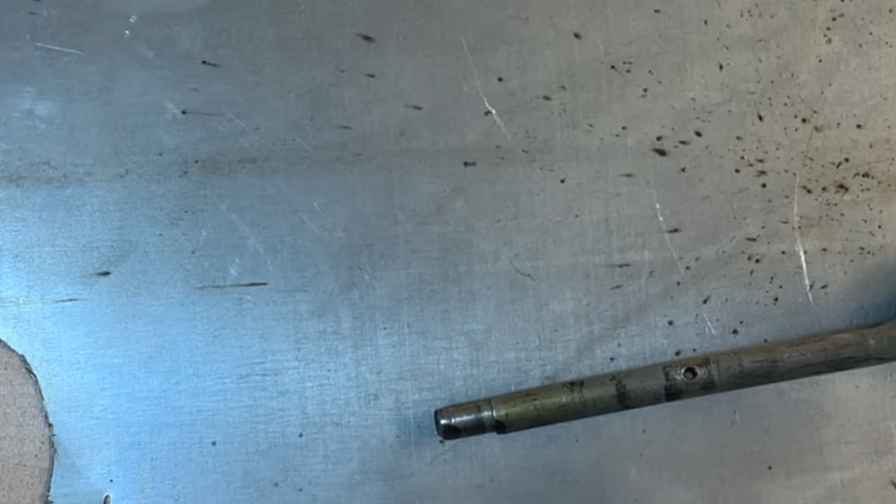Hey guys, welcome back. So in the last video, I was removing the M46 shifter from my 77 242, and I realized that the shifter, or the shift knob, did not match the transmission that came with the car, and we had to do some customizing to make it fit correctly.

In this video, I'm going to actually be taking apart that shift lever to replace some of the worn pieces in it, including the reverse lockout shift rod. And also I'm gonna attempt to fix the nicks and the dimples that were created on the shift lever ball from the lack of bushings before. And then if we have time, I'm going to try to turn it into a short shifter as well. So I'll get right down to disassembling the shifter now.

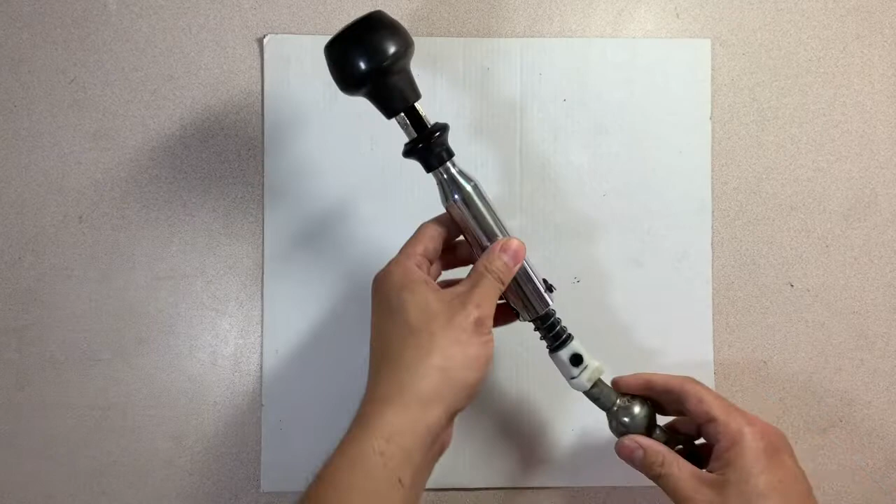The first thing you want to do is to take the knob off, and the knob should not be glued on there. If it is, someone else messed that up. It should just pop right off. Just give it some firm pressure and it should pull off, and then just set it off to the side.

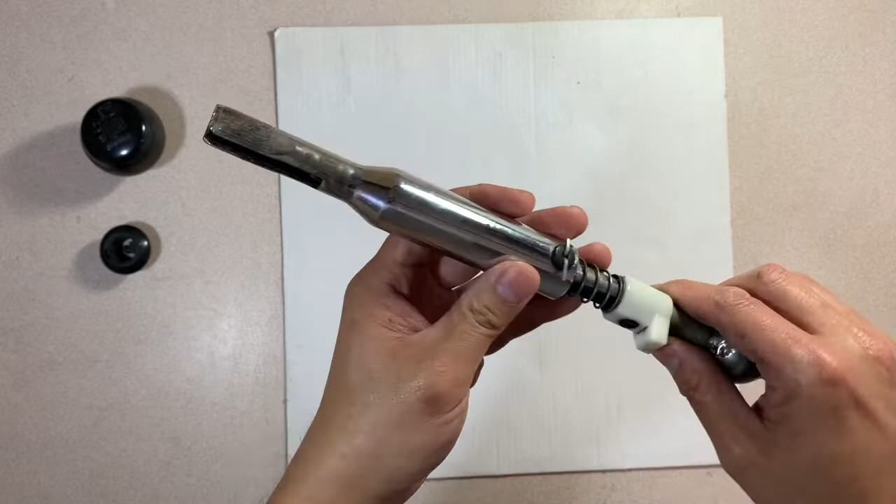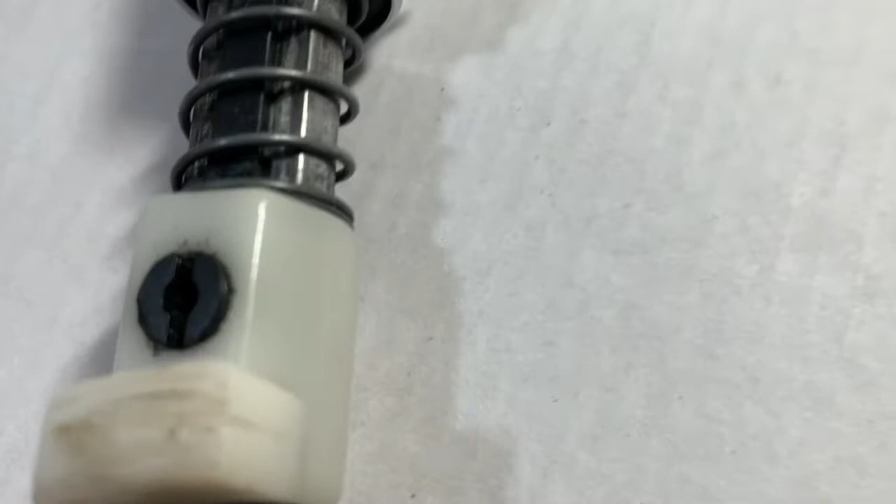The next thing is the lock collar for the reverse lockout, and after that you should be able to look inside the tube. It's a two-piece assembly, the shift lever. The top piece is held in place by a bushing, and it's usually a roll pin, but mine had this clip instead. And then it has pressure on the spring and the reverse lockout switch lever there.

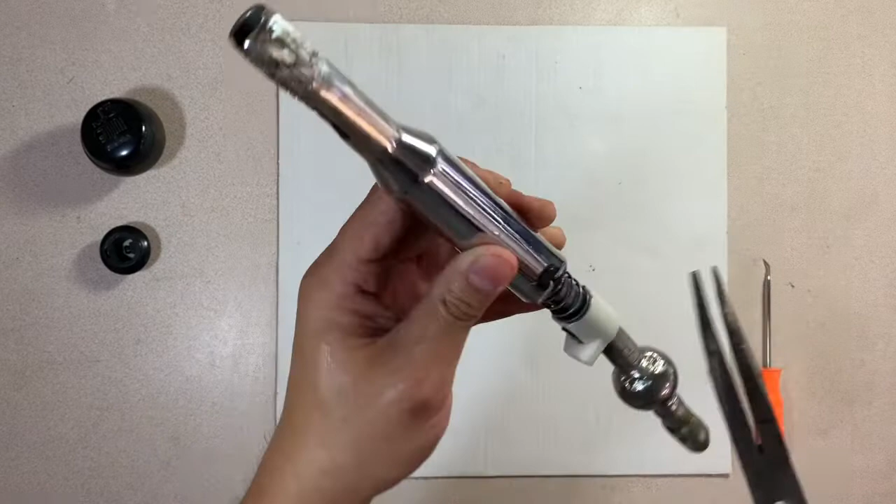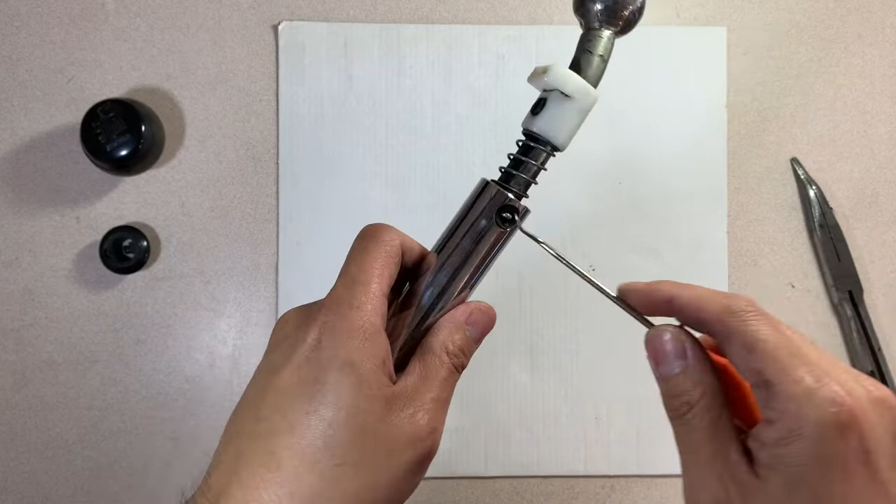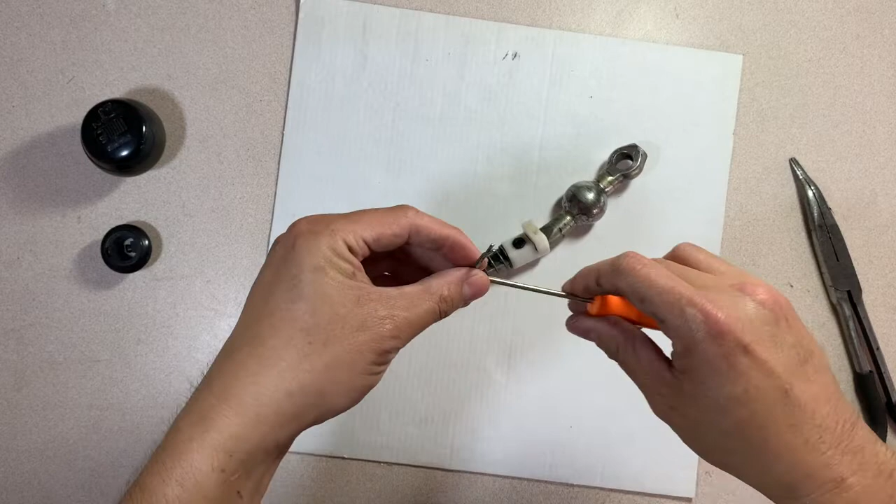So I'm going to go ahead and remove my clip here, and if you have the stock roll pin, what you would do is try to find a similar diameter tool and just press it out on one side, and just try not to mar it too much, because you will need to reassemble it and use that in order to keep the two pieces of the shift lever together. But once it's out, the top chrome piece should slide right up.

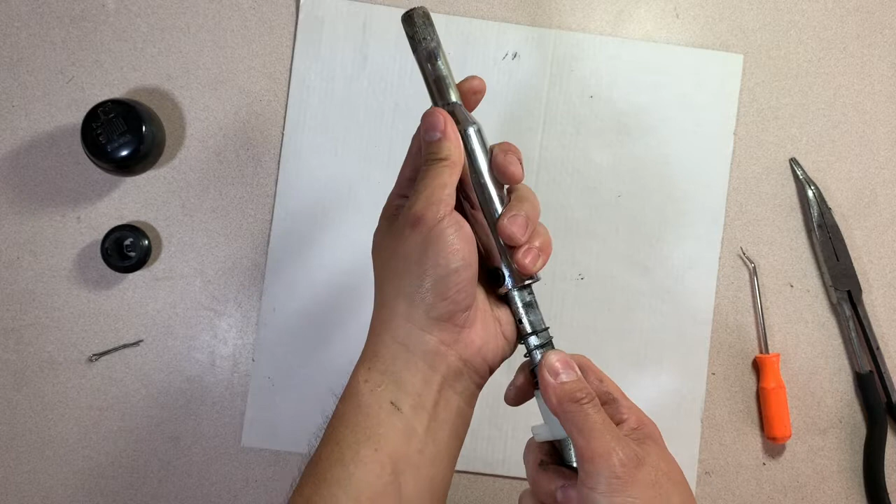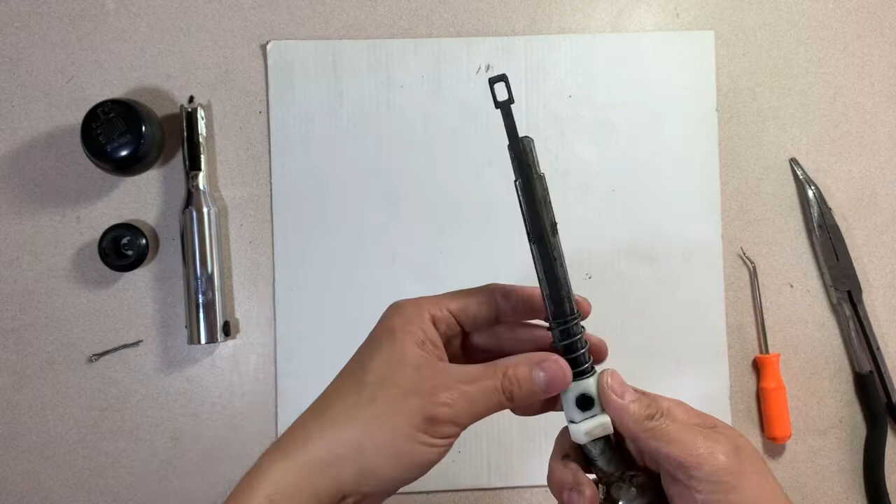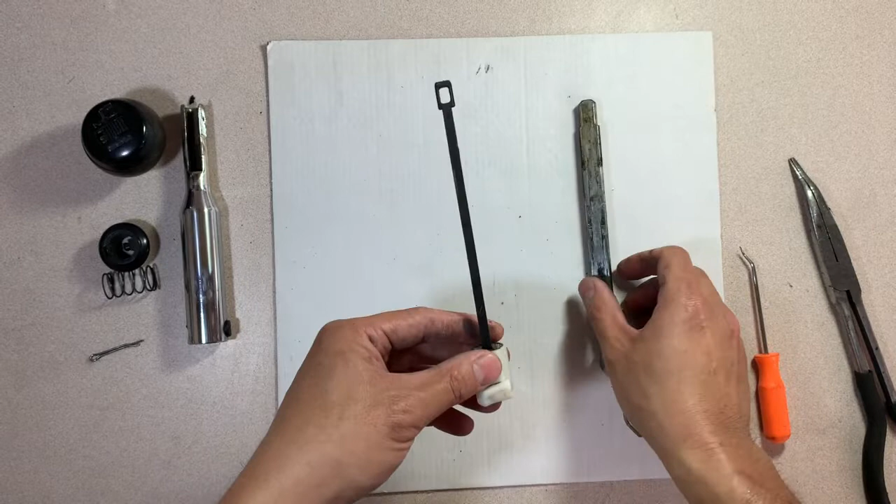And again, there should be two bushings in there, one at the top of that and one at the bottom where the pin goes through. And so once you have the top half of the shift lever disassembled, you can slide the spring off, as well as the reverse lockout thingamajig, and then the reverse pull rod as well. These pull rods, I think you can only get them in plastic now. So we'll see if we can figure out something with that.

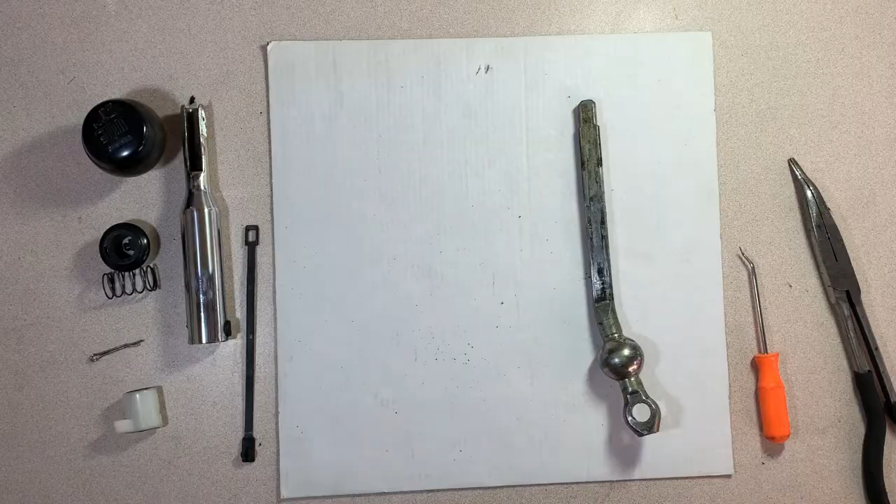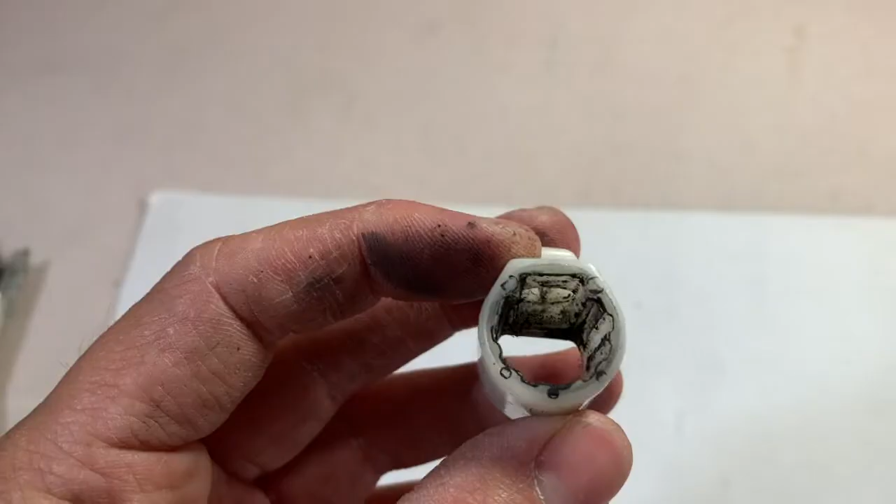The lower bushing on mine is still in shape. You can see it's shaped exactly like the orientation it should slide into the lower part of the lever. So you shouldn't get that mixed up. And this piece is also in correct shape as well. The pull rod I will have to replace. I happen to have the 6-inch version, and I think there's two different sizes.

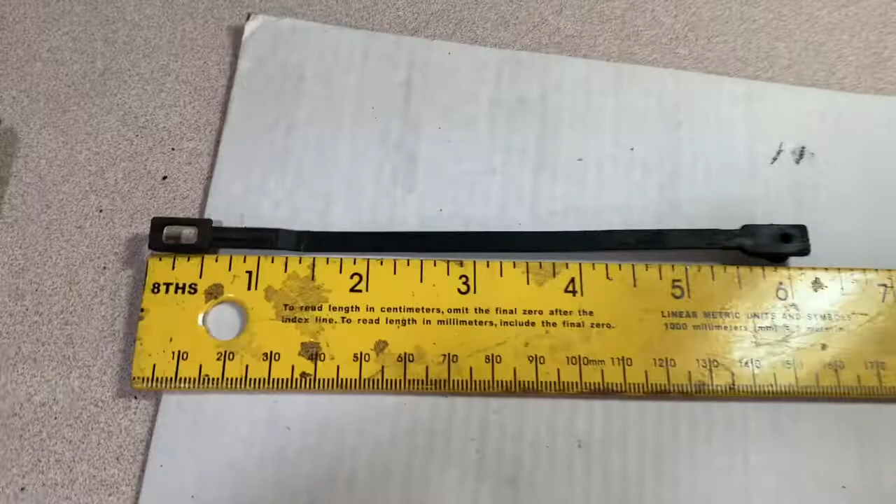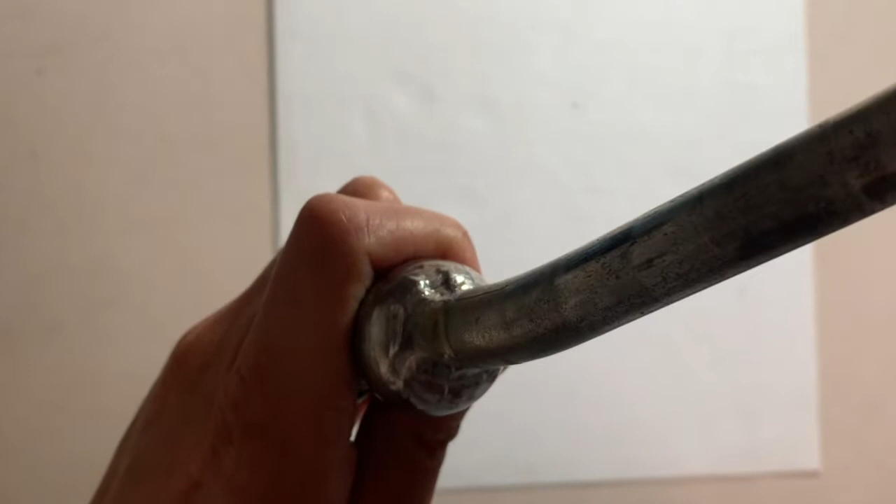So here is the shift lever, completely disassembled, and again, I've shown this a couple of times, I think already. Let me get some light. Yeah, there's a lot of weird scratches here. So what I'm gonna try to do is clean this up and try to fill that in with some weld, and then try to polish it down so it's kind of a ball shape again.

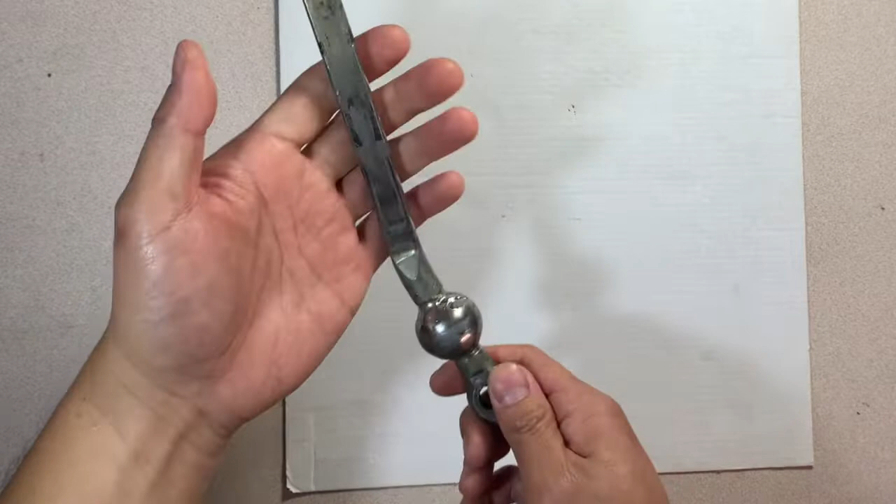Yeah, I don't know if it's gonna turn out, but I do have a replacement shift lever, but they don't sell these anymore as far as I can tell. I think you might be able to find a complete short shifter version that comes with everything, but as far as just an OEM metal rod, I don't think you can acquire these anymore.

So even though I have a replacement, I'd like to see what I would have to do in the event that I don't have one, or if you can't get access to a replacement one, you might be able to salvage this still. So we're going to clean it up.

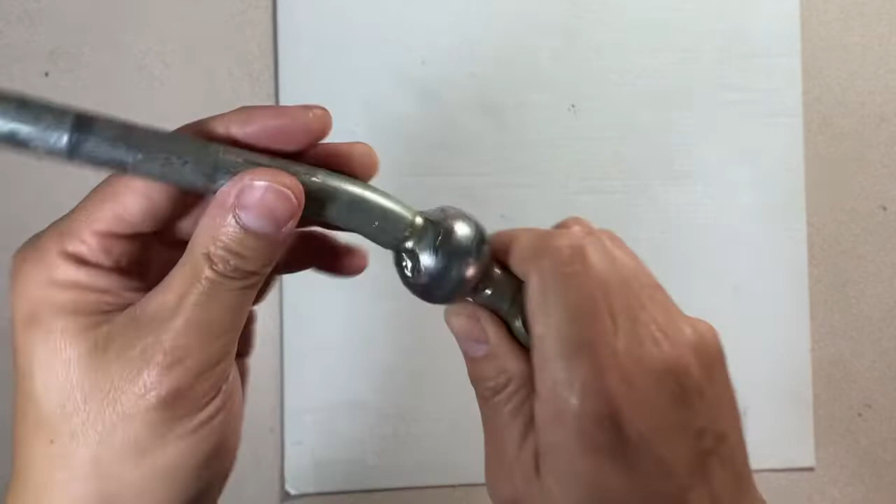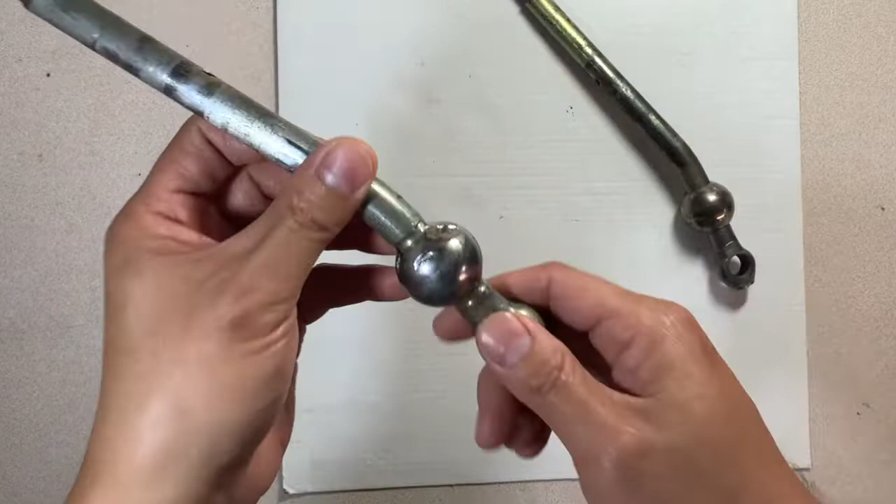And there is some stock coating on there, and I think it's either, I can't tell, I think it's either zinc or maybe cadmium plating. Either way, you really don't want to weld onto it, but the areas where I need to fill in are pretty worn.

The coating or plating is worn down already, so I don't think I have to worry too much about that. But I will try to get out as much of that plating as possible just for safety reasons. Yeah, so I'll go ahead and get this cleaned up.

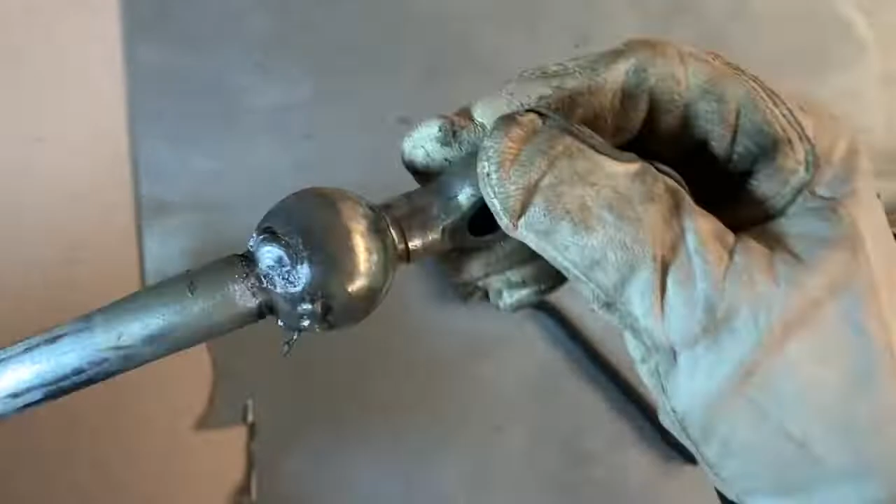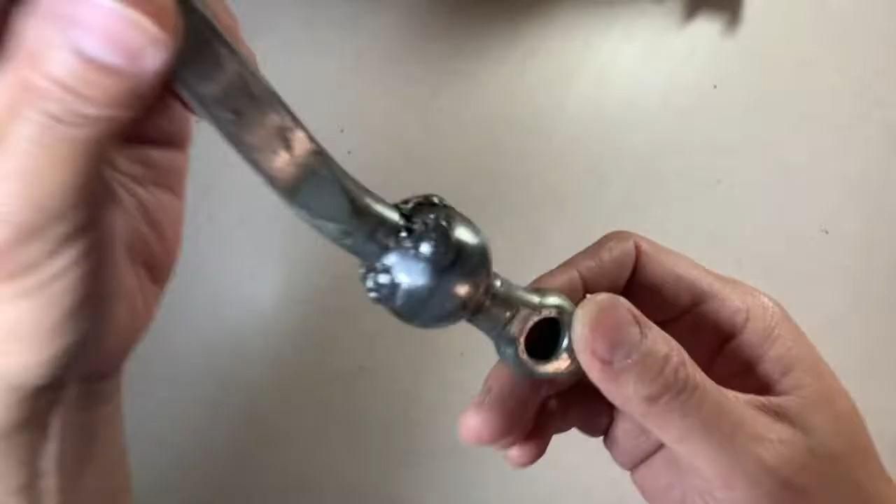Okay, so this is the shift lever after I've welded on it. I am still kind of a beginner welder, so just still learning how to do some of the stuff. And the first pass, I think it didn't have enough heat, and when I turned it up, the penetration was a little bit better, but it looks like most of the low spots are filled in pretty good.

I'll have to just knock this down and then see if I can grind it smooth and round, and if it's still low, I'll add in some more weld and go from there. But yeah, I think this is a pretty decent start. We'll see where this leads us.

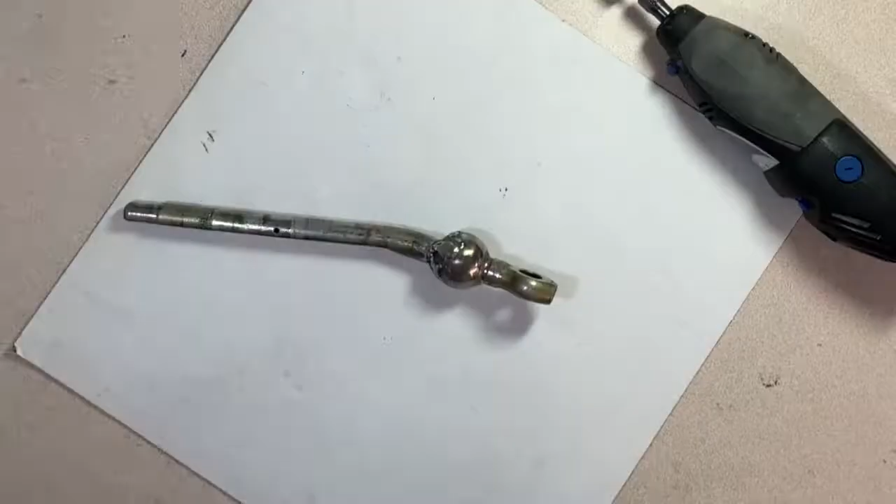So the shape is mostly all back. There are some of these little pinholes where the weld didn't completely penetrate, and I did make a couple of nicks when I was grinding the excess weld off. But all in all, I think it's gonna be okay. Now I've just got to smooth this out a little bit more and then polish it smooth.

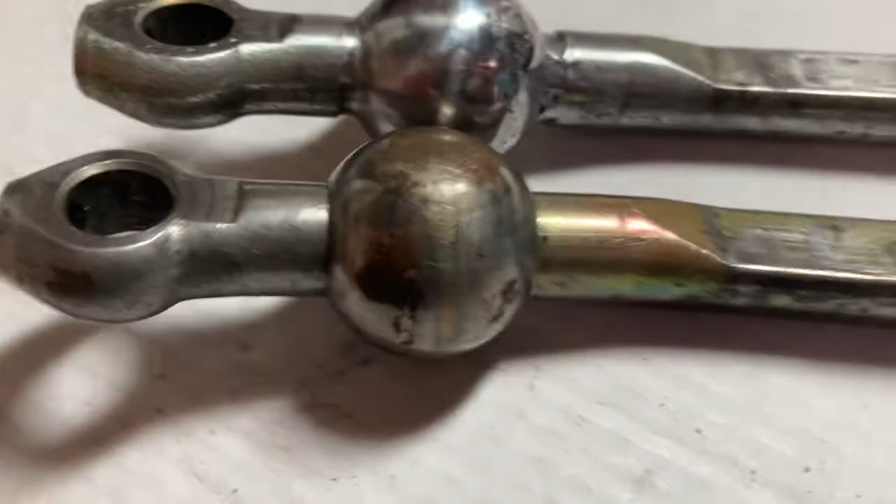Here it is side by side with the extra shift lever that I have, and you could tell that it's obviously not perfect, but I think it's smooth enough to function in the way that it should, without catching on the bushing or anything like that.

I wish I could do a more perfect job, but I don't have access to the machinery to machine it to a really smooth surface. But I'm pretty happy with it. I think it'll work.

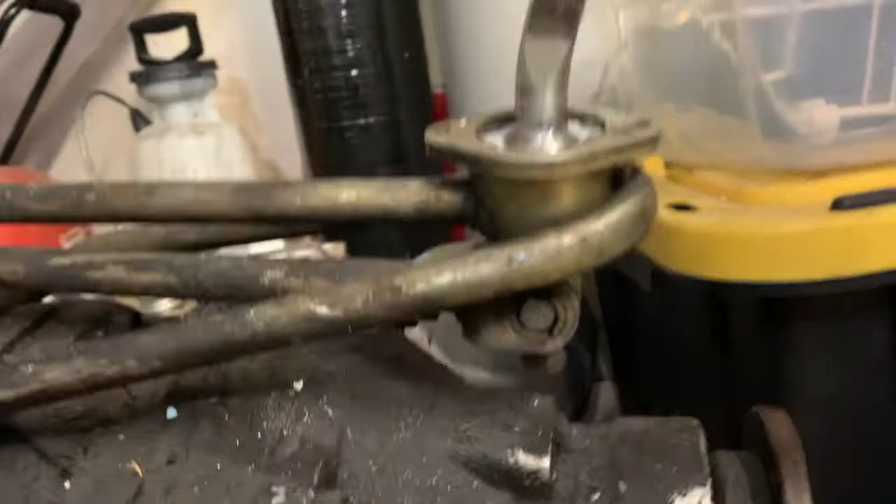All right, so to turn the shifter into a short shift lever, we are going to have to extend the section that's below the fulcrum, or the ball. And the more you extend it, the less travel it's gonna have to do, right?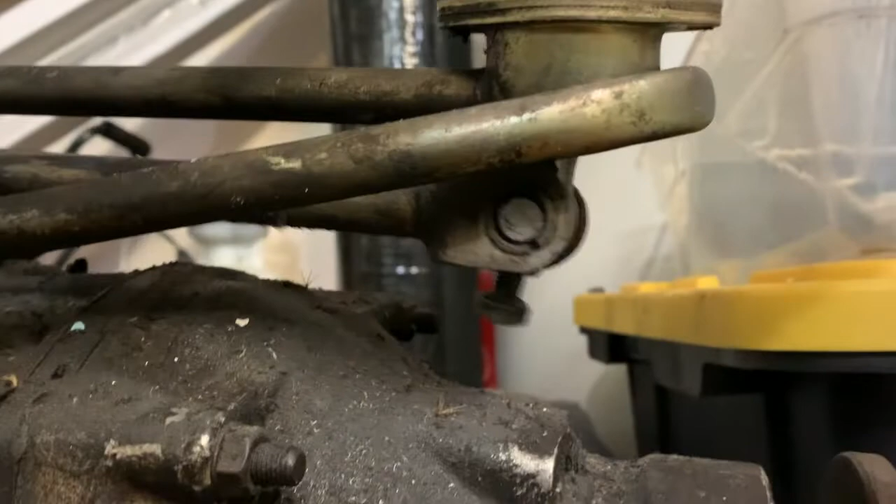But the issue here is that you want to make sure that you don't extend it to the point where the shift lever contacts the transmission. And an even bigger issue could be the shift linkage just dragging on the top of the transmission case.

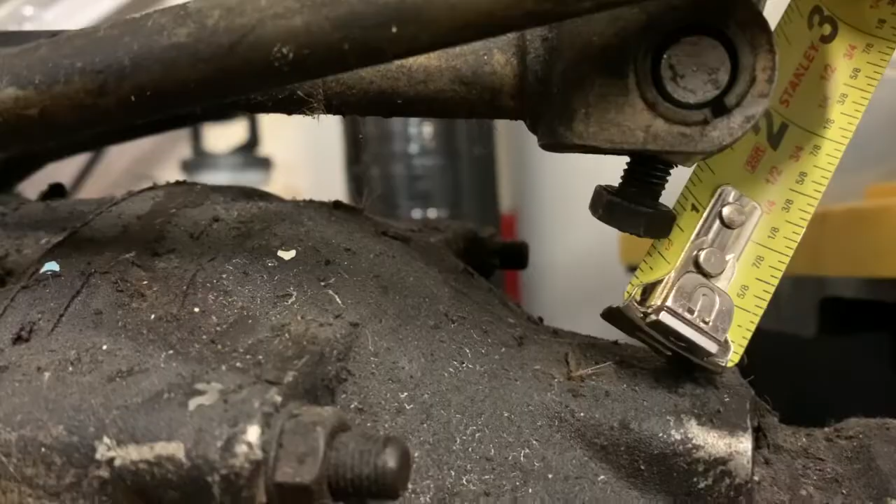And this is not normally the type of set screw that you would use. This is what I have laying around. The other OEM style actually goes into it, but I'll just use this as kind of a placeholder. So it looks like I could probably extend it. Let's do, yeah, somewhere between 3/4 and 1/2 inch is where we want to extend.

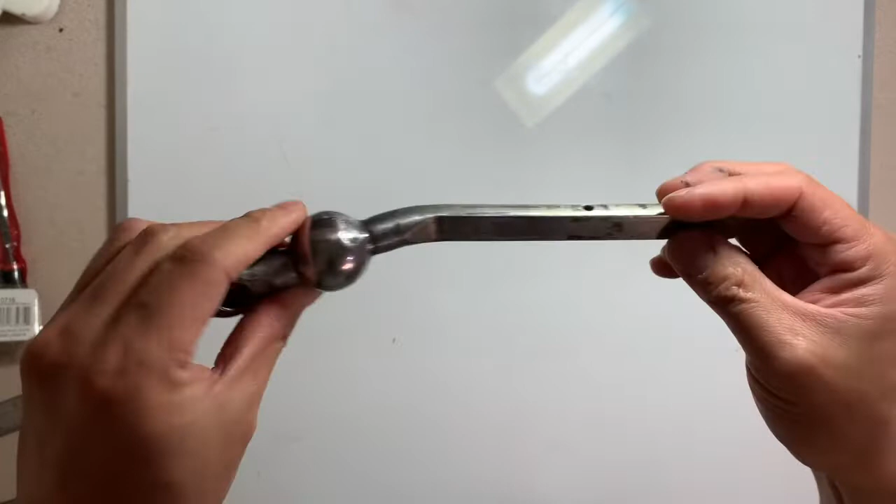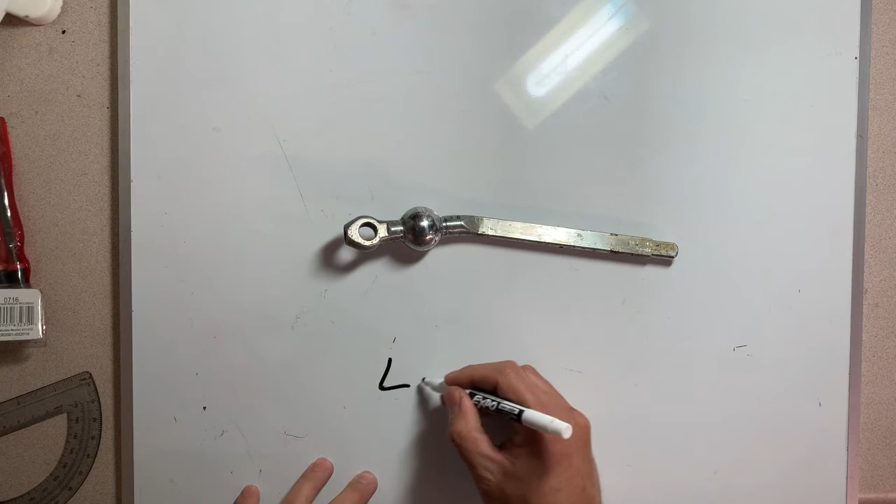So I actually failed physics the first time around, but let me see if I can get this correct. All right, so the shift lever that we've been talking about this whole time is simply that. It's a lever, which is just a straight bar with a piece somewhere around the middle that it pivots on.

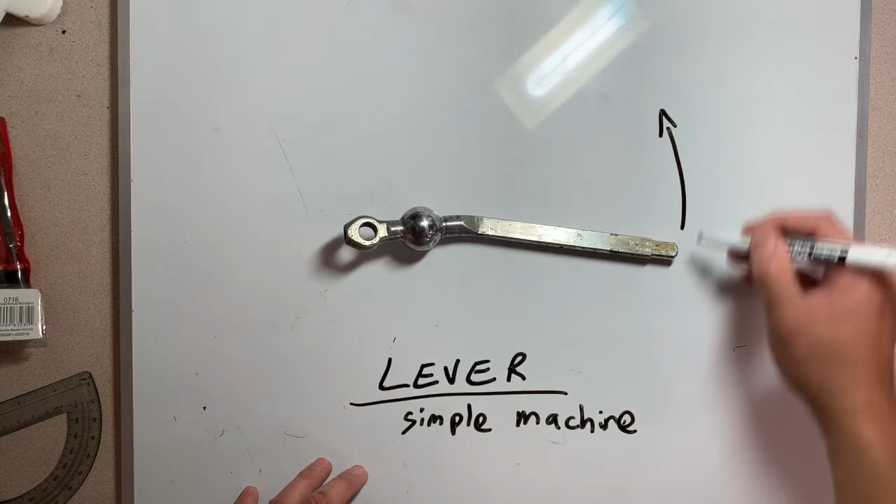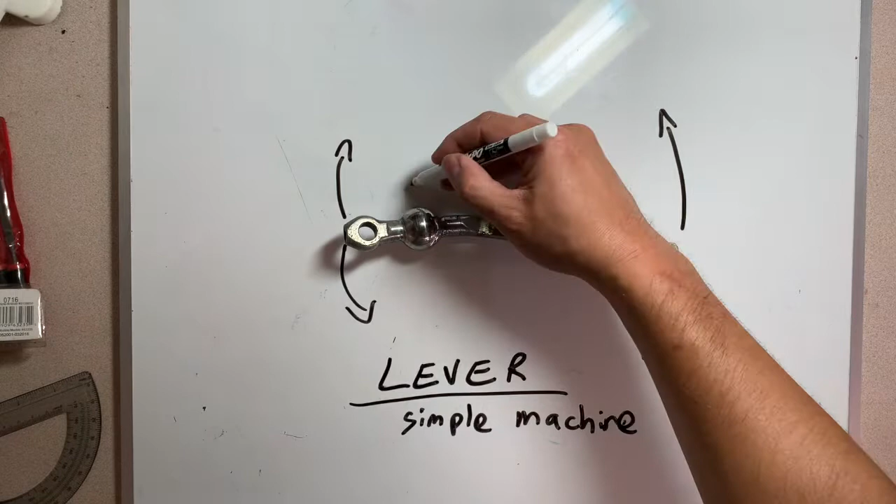It's what's known as a simple machine. It's one of the most simple machines, second to, say, a ramp, for example. And the direction that the shift lever pivots is going to be up and down in each direction, with the ball section known as the fulcrum.

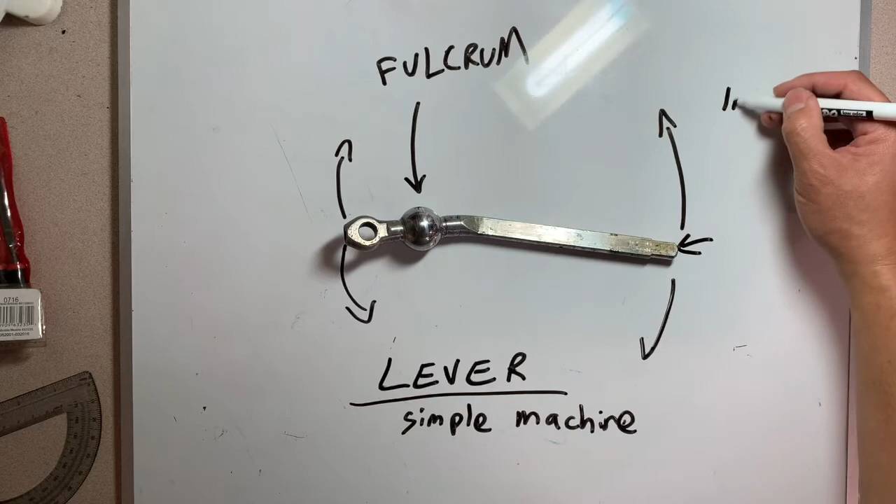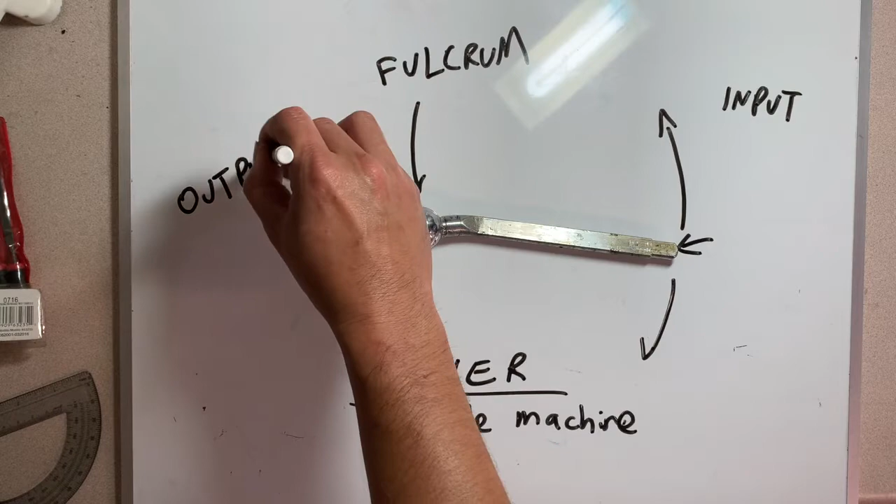So what the part that you handle is also known as the input section, and the other side that's connected to the shift linkage is known as the output. And if I'm doing this calculation incorrectly, please feel free to correct me in the comments.

So this might be common knowledge to some of y'all, but I have never had a short shifter before, and I didn't really understand all the physics behind it. I was always under the impression that short shifters were easier to shift, but that's not really the case.

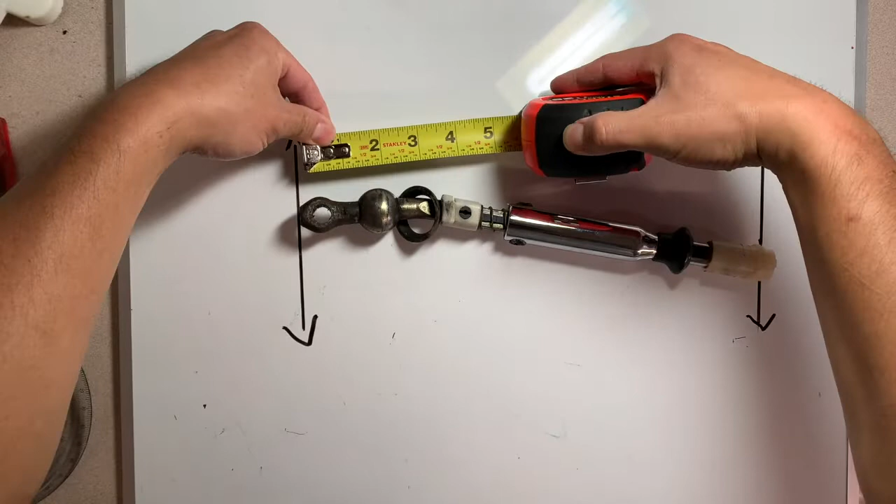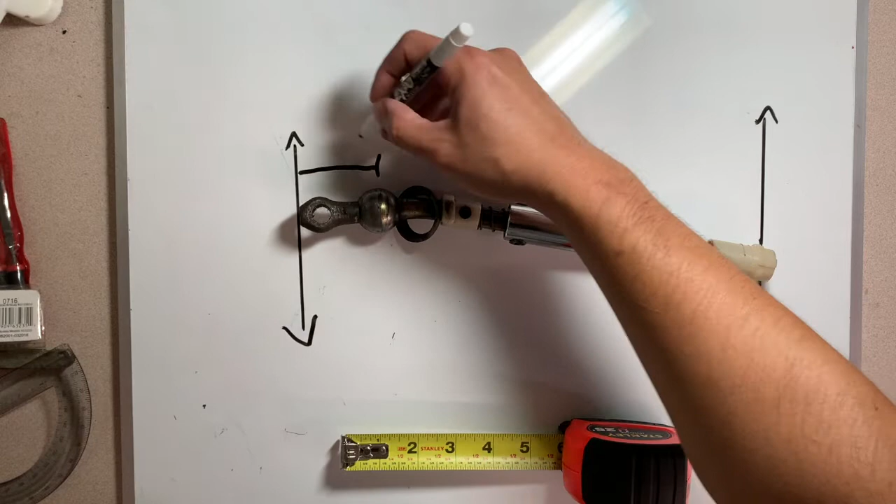So yeah, I wanted to get some numbers on a stock shifter before I decided to turn mine into a short shifter. And so what I'm doing here is I'm trying to measure the mechanical advantage of a stock length shifter.

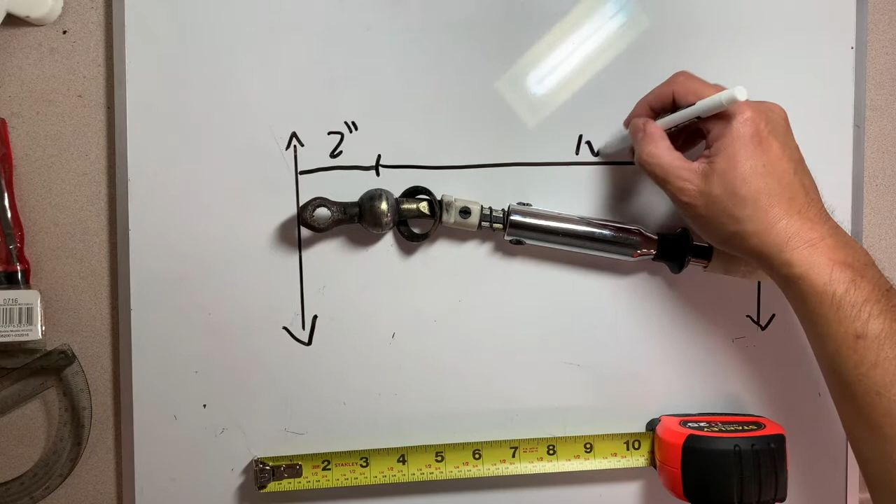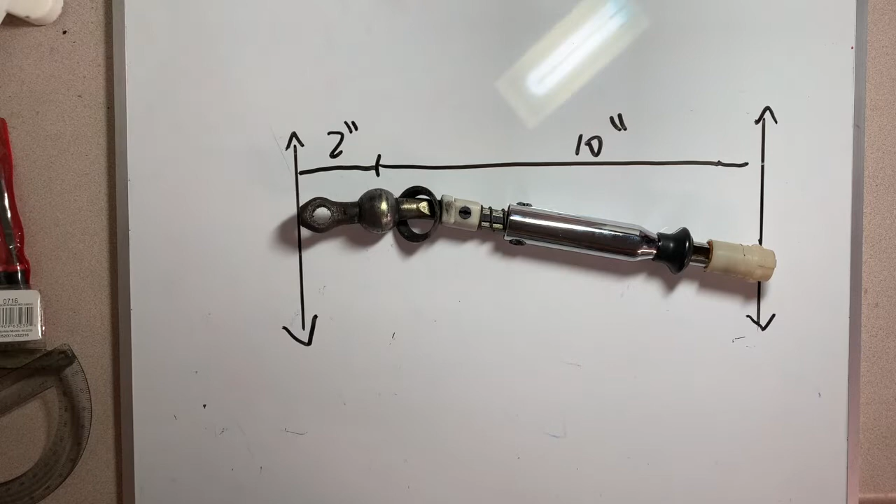I'm measuring the distance from the fulcrum to the area in which that is connected to the shift mechanisms under the transmission, and the distance from the middle of the fulcrum to where I would be gripping the shift knob. So you have the two distances here. It's 2 inches and 10 inches.

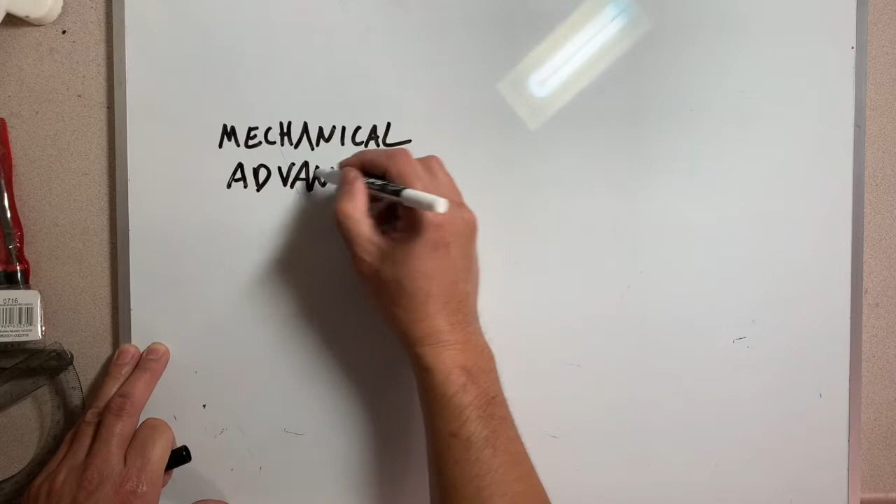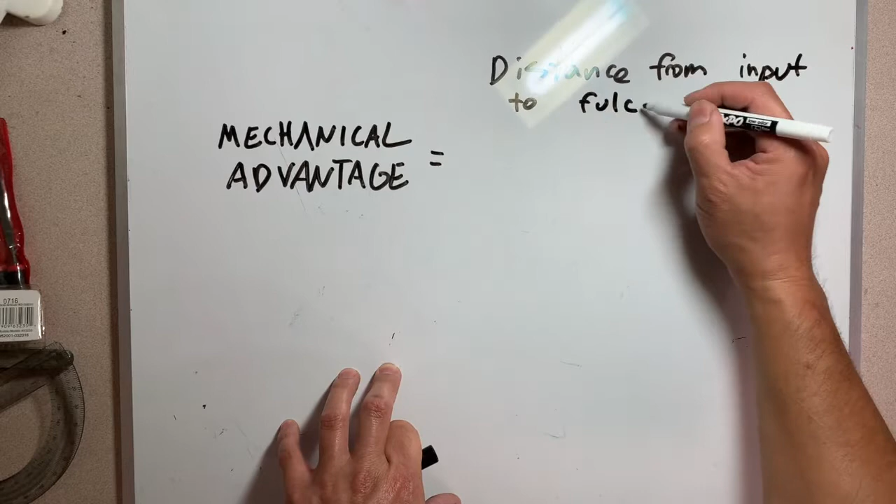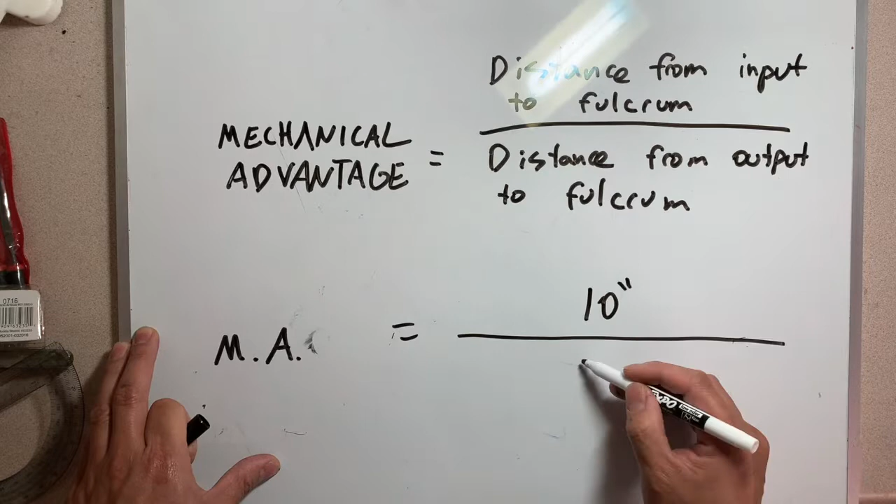And the formula to get your mechanical advantage is the top distance, the input distance between the knob and the fulcrum, divided over the output distance, which would be between the fulcrum and where the shift linkage connects to. And once you do that problem, you come up with the number 5, which means that your mechanical advantage is 5.

Meaning that the lever actually increases the force applied to it by a factor of 5, and that's pretty good. That's one of the reasons why the Volvo 240 shifters are so easy to shift. It doesn't take much effort at all. It also means that the distance in which you have to apply that force is greater.

So in making a short shifter, you're increasing the section below the fulcrum, and that will take away a little bit of mechanical advantage, and it really just should reduce it down to 4, which still isn't bad. But the payoff is that the distance applied is going to be lessened as well.

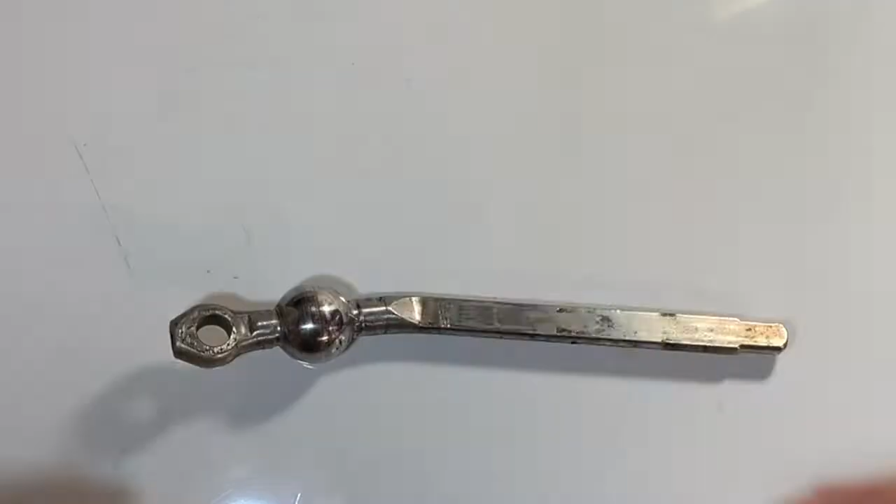So I'm going to mark the area right below the fulcrum in which I'm going to be making the cut. I want to make sure that's not too close to the ball, but also not too close to where the spindle pin would go in. So right in the middle is where we want it.

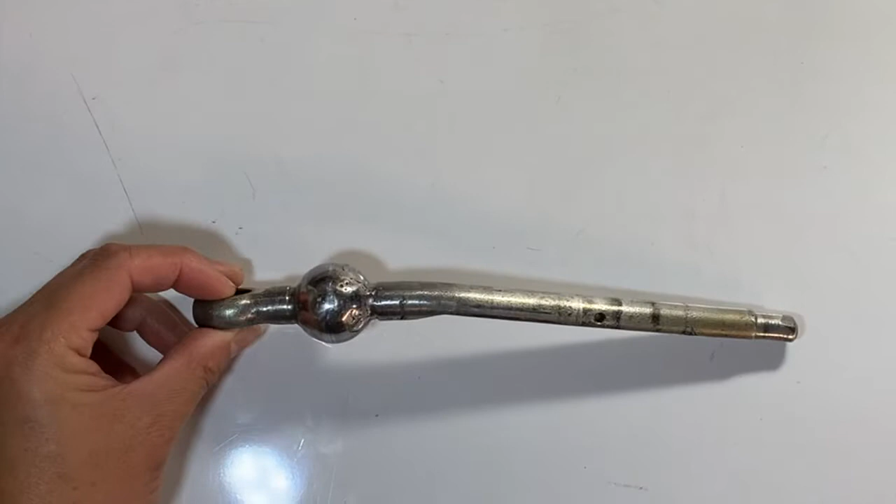I'm also going to use my engraving tool to put a little arrow on the two halves. That way, whenever I do weld it back together, I don't have it backwards or facing the wrong direction. I could use a marker, but once I start cutting and welding, those marks can fade.

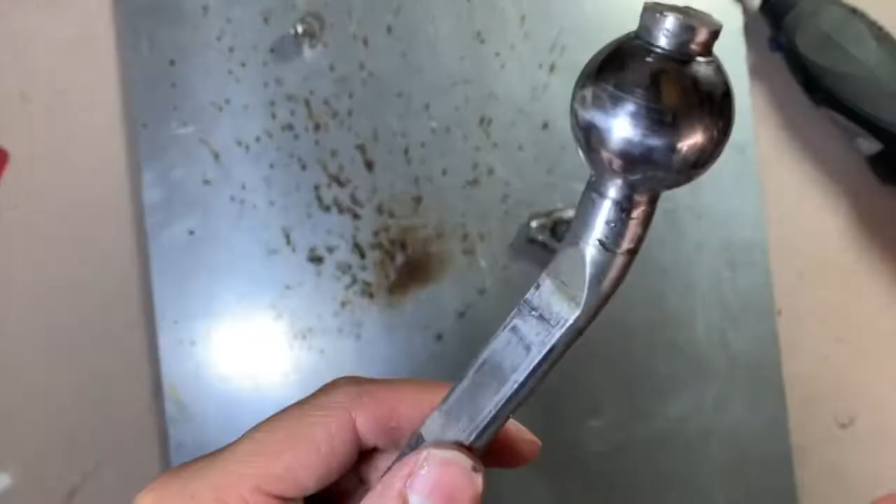So here is the cut off side of the lever, and here's the area below the fulcrum. I tried to leave enough meat so I could weld onto there without interfering with the areas that are going to be contacting other parts of the transmission.

And then here is a slightly larger than 1/2 inch piece of metal rod that I'm gonna weld in between there. The diameter is just a little bit smaller, which I don't think is ideal, but I think it's gonna be the right strength at least, and well, we'll see how it goes.

In retrospect, I wish I would have done this before I repaired the ball section on the fulcrum of the lever, but you know, I did that part first. So we'll go ahead and weld this up.

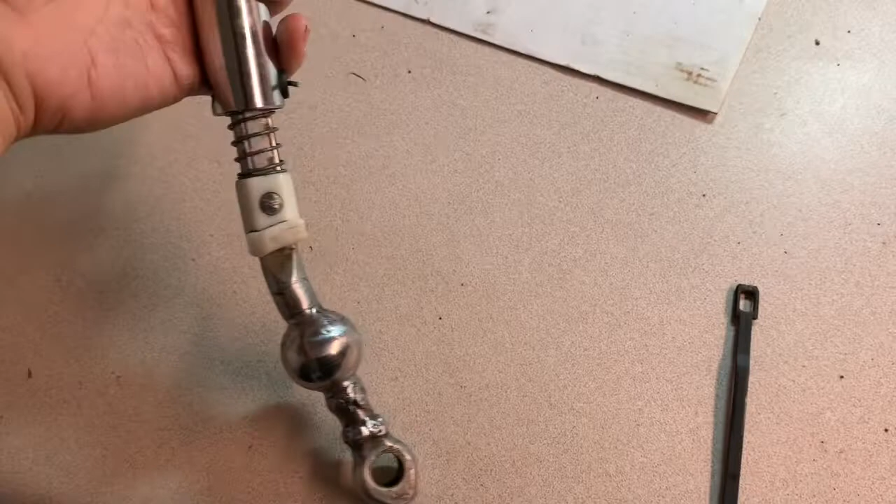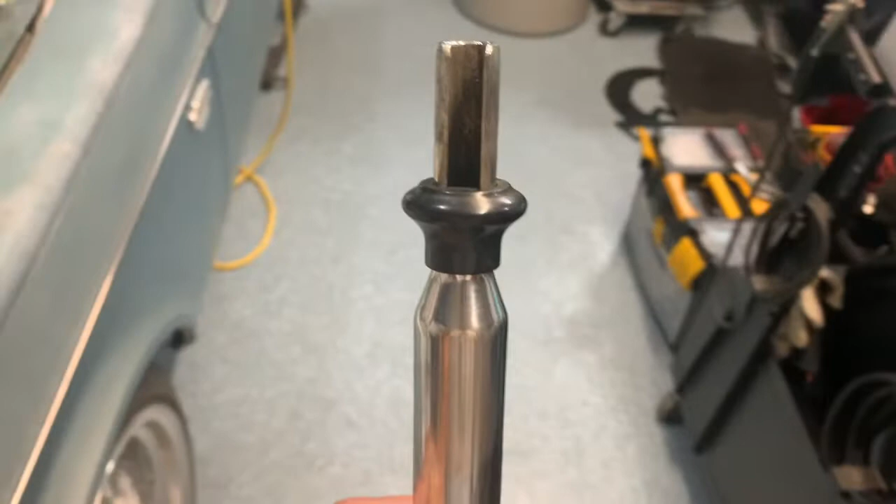Put back, we've got the top and bottom halves together, and the C-clip and the bushing, and yeah, looking good. So now the shift lever is all repaired and put back together, and I think I'm gonna wait until the next video to actually install it into the car and take it for a test drive, but it's looking good, and I can't wait to try it out.